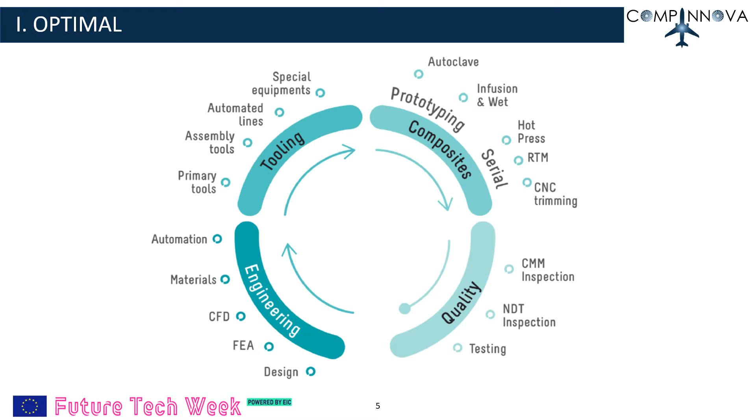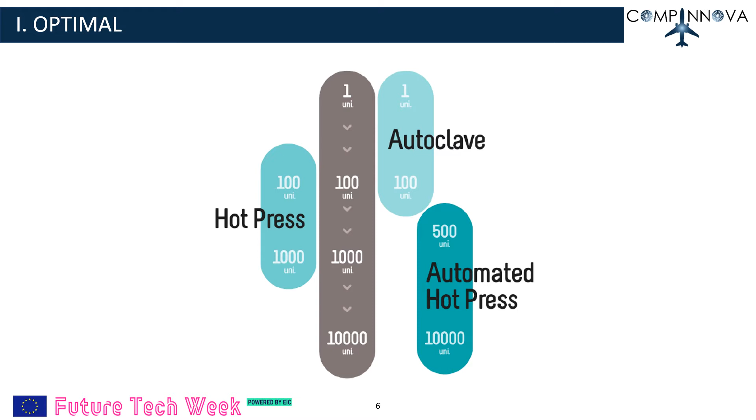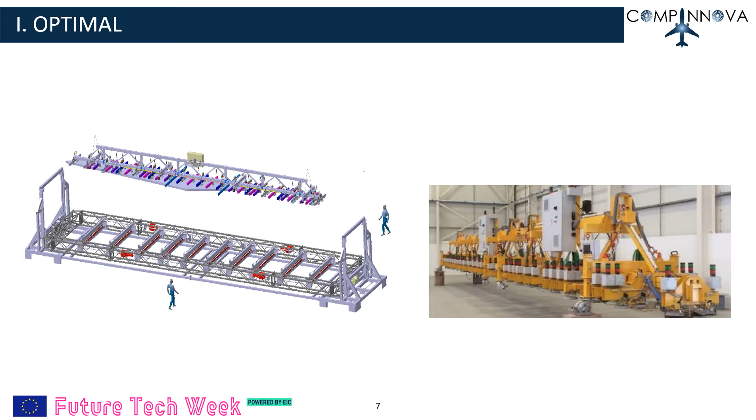We close this cycle with our quality assurance capabilities, which include a CMM inspection machine, ultrasound, and testing facilities. Depending on the method, our manufacturing capacity can range from 1 to 10,000 composite units. We also dedicate our time to the development and manufacturing of special equipment. To give you a couple examples, on the left-hand side you can see a large automated device which was used to rotate composite wing panels. And on the right-hand side you can see a vacuum sling which our client used to move those panels across their factory.

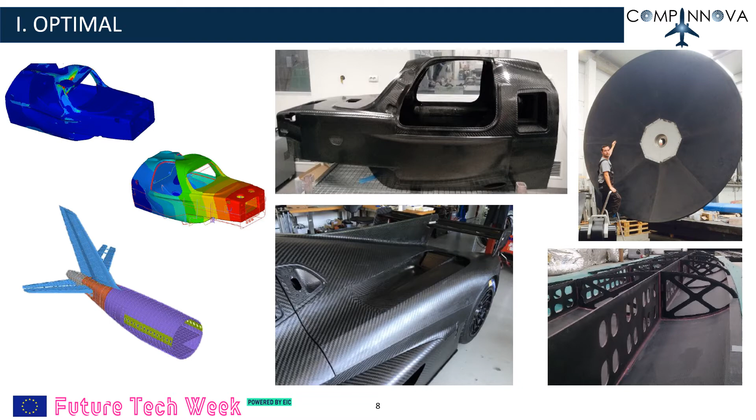This slide shows you some of the things we have worked on over the years. On the left-hand side, we see examples of finite element analysis performed on the Airbus A350 fuselage and also in a couple of Le Mans prototype chassis. The photographs in the middle of the slide show you one of these chassis and also some bodywork panels Optimal has manufactured for a hypercar. On the right-hand side, you see an antenna for the Galileo ground station segment and also a fixed wing we developed for a C-class catamaran boat.

I would now like to talk to you about the industrial perspectives of future NDT technologies. NDT technologies are particularly interesting for the manufacture of composite parts and structures, not only to repair damaged structures, but also to iterate and refine the manufacturing processes of very specific and demanding prototype components. These technologies are often used to detect voids and delaminations within the parts for further removal of the material and placing of patches in the area to repair.

If we think of traditional NDT technologies, such as ultrasound, phased array, TOF, or X-ray techniques, these are the most common and widespread across the industry. Of course, there are new technologies being implemented, such as drones and image correlation techniques, but these are not yet so widespread across the industry. If we think of the traditional technologies, we soon realize that these are mostly manual, time-consuming, require specialized personnel, and are overall expensive to have and to use.

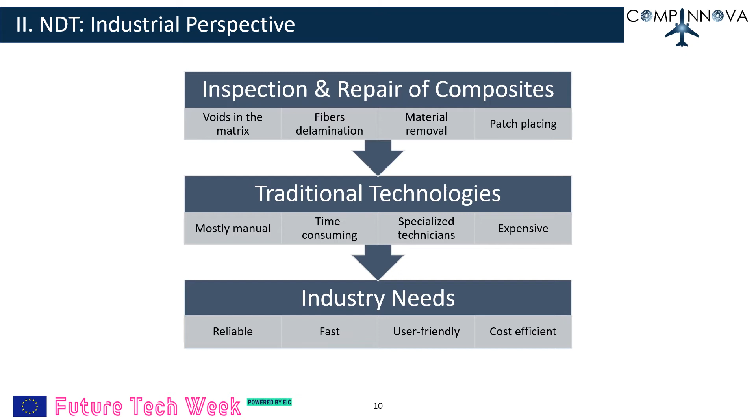So we believe the industry, in particular the composites and aeronautical industry, requires new methods. Methods that are reliable, that produce repeatable results, not liable to human error. Methods that are fast, which are automated and can be used during the downtime of a factory. Methods that are also, so to speak, user-friendly, that require no special long-term training of a technician or no specific proficiency in engineering. And above all, methods that are cost-efficient, that require no expensive consumables and have overall low maintenance.

For Optimal, CompInnova means the opportunity to be a part of the development of a novel NDT technology that is likely to have a major impact throughout the aeronautical and composites industry. Our role is also to supply aeronautical composite parts for testing and to overall help understand the viability of this technology in future industrial applications.

So how can CompInnova meet the industry needs we have just identified? Well, it is automated, making it reliable and less likely to be affected by human errors. It is fast and can be used during the downtime of a factory. It requires minimal human oversight and no specific proficiency in engineering or electronics. And overall, it is cost efficient, requires low maintenance, and has no expensive consumables associated to it.

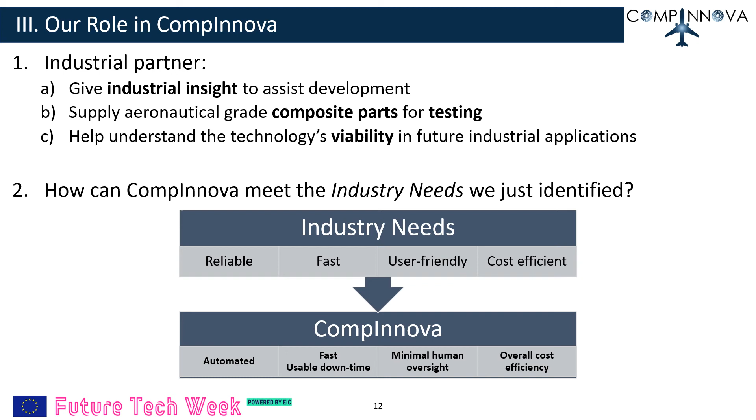It is now time to tell you what you can expect from the CompInnova technology. Our laboratorial tests at small scale have shown that this technology has several advantages in an industrial scenario. It is particularly suited for large-sized parts. It is especially useful during the downtime of a factory, and it can be advantageous to have a squad of robots working simultaneously with different modules, as infrared thermography and phased array work at different stages and at different timescales in the detection of defects.

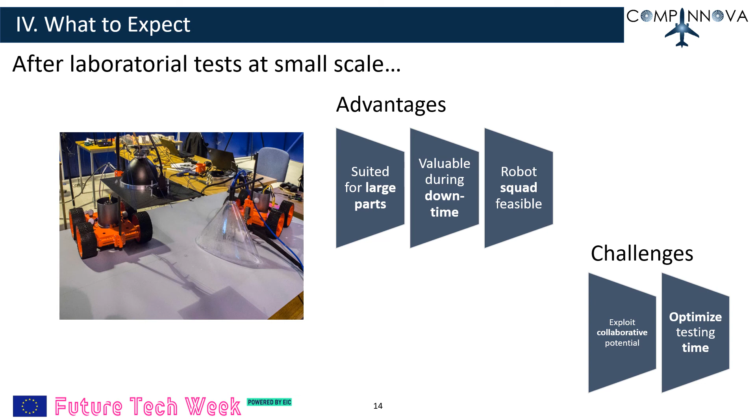We have a couple challenges we will tackle still, one of which is exploiting this technology's potential to work as collaborative robots alongside humans assisting in the manufacturing and repair of composite structures. And of course, the other is to tune and optimize the testing time as much as we can.

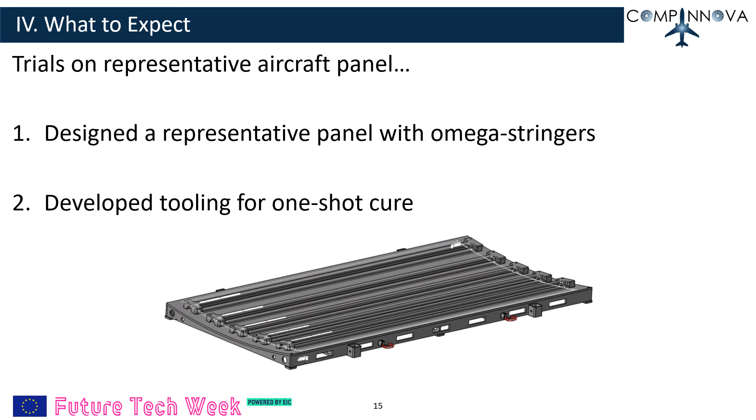The next step for the CompInnova technology is to perform trials on an actual aircraft panel. We have designed a curved panel with omega-shaped stringers, and we at Optimal went through the full cycle of developing a tool: designed, machined, and controlled the geometry before using this tool to perform a cure in autoclave. For this panel, we have used unidirectional pre-impregnated tapes with T800 fibers from Toray. These fibers are extensively used in aircraft structural applications, including in the Airbus A350.

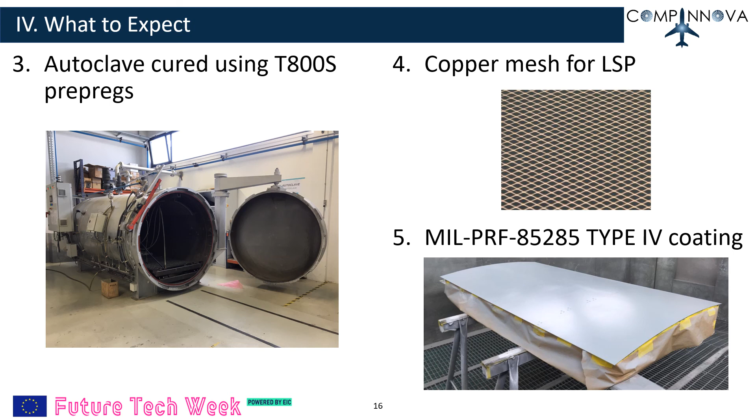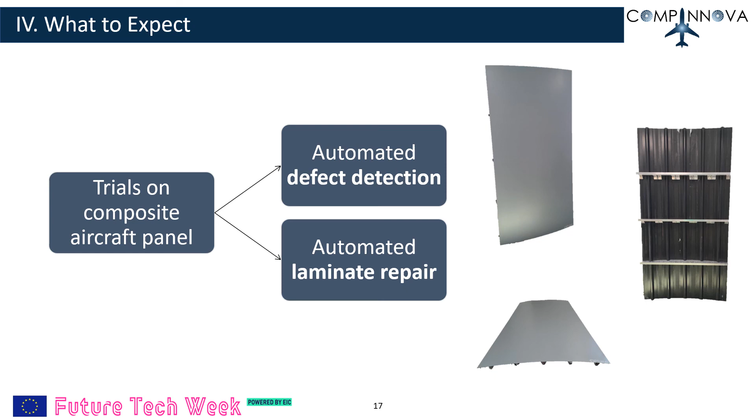Additionally, we have included Dexmet copper mesh to accurately reproduce the lightning strike protection usually employed in composite aircraft. And finally, we gave our panel a military-grade aircraft paint scheme. The trials on the aircraft composite panel will assess firstly the integration of the phased array and infrared thermography modules on the Vortex robot platform, and also the success of the material removal and patch placement repair setup.

The last step will then be to join all the technologies together in order to determine the total cost of ownership of the CompInnova technology. To do so, we will estimate the capital expenditure and the operational expenditure required for each module and ultimately for the whole technology. We will end up with a fair estimate of how much this technology would cost to the end user, which is the same as to say to the industrial client.